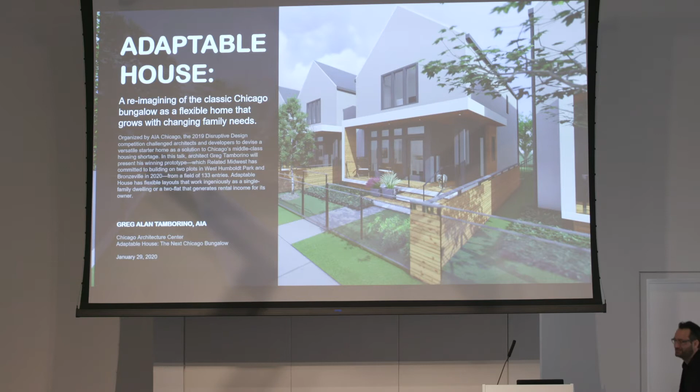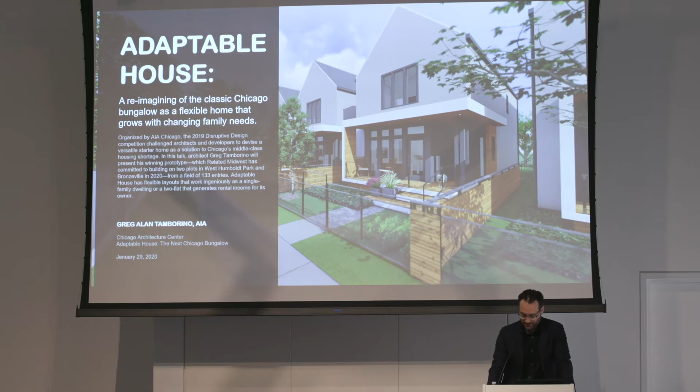All right. Thank you, Ian, for inviting me here to speak about the Disruptive Design Competition. Very pleased to have this opportunity to share with all of you the story about the competition and how we are trying to help sort out the problem of attainable housing in our city. I'll begin with a little background about myself. My name is Greg Tamborino, and although I've traveled many places, I'm a product of the Midwest. Growing up in Wisconsin, and after having bounced around to a few different cities, I've had the pleasure of calling Chicago my home for the past 17 years. And for the past 14 years, I've been with the Chicago office of Perkins & Will.

We are a global architecture and design firm specializing in architecture and interior design. We are celebrating our 85th year, having been founded in 1935 right here in Chicago. And having since grown to 2,700 employees and 26 offices around the world, we have 14 areas of practice, and I have had the opportunity to work in several of them. But for most of my career, my focus has been on urban high-rise, residential, and mixed-use commercial buildings.

I developed an interest in architecture and in general the craft of building things when I was a teenager working for my dad's construction company. Here I learned everything from keeping a job site clean to swinging a hammer in 10-degree below zero weather, which after a few years I very much determined I wasn't cut out for, swinging a hammer, doing anything in 10 degrees below zero weather. And eventually I decided I would go away to architecture school.

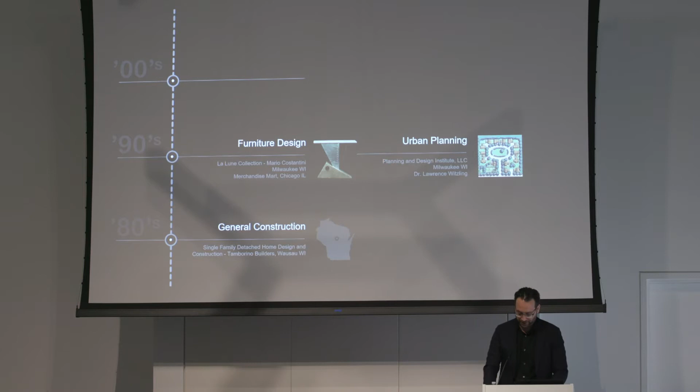And I feel genuinely lucky to have bounced around to a wide variety of work experiences because I feel like there's some component of each that trains you to be ready for whatever comes next. Everything from the intricacies of how a piece of furniture goes together at one scale, working for a furniture designer, to working on master plans for whole cities with an urban planning firm on the other scale.

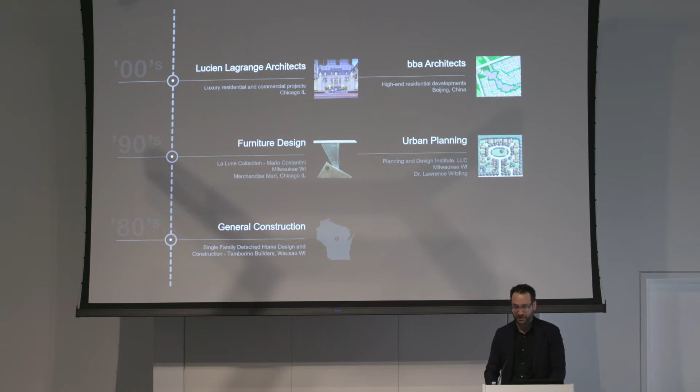In my career, I've had the chance to work on very high-end luxury residential and hospitality projects with astounding high budgets, to traveling to other countries and learning and adapting to different cultures. And there are many more jobs I've had over the years, but the point is there is some piece of each of these experiences that I can point to when I think about how I work and how I think about design.

And I'm here today to talk with you about the disruptive design competition. Because to be honest, the issues that the competition is dealing with are things that I have been contemplating my entire career and involve experiences that I can relate to for much of my life. But it was the combination of those interests and experiences along with the timing of the competition that really pushed me to finally explore the design for an affordable home.

To transition the conversation to the design of the house, I would like to make some conceptual connections to projects I've worked on that directly affect the way I think about design, and then I will show my design and how it addresses each of the goals of the competition. I'll talk a little bit about what the disruptive design competition is, including who envisioned it, the problems they are trying to address, the multi-phased process, and how it unfolds. And after that, we'll have time for a few questions.

So whose idea was this? I can tell you it was not mine. It was a group called the Chicago Housing Policy Task Force, and is composed of a group of organizations with a common goal of investing in the creation of affordable housing in Chicago. So the group includes Neighborhood Housing Services, the Chicago Neighborhood Initiatives, AIA Chicago, LISC Chicago, and Northern Trust.

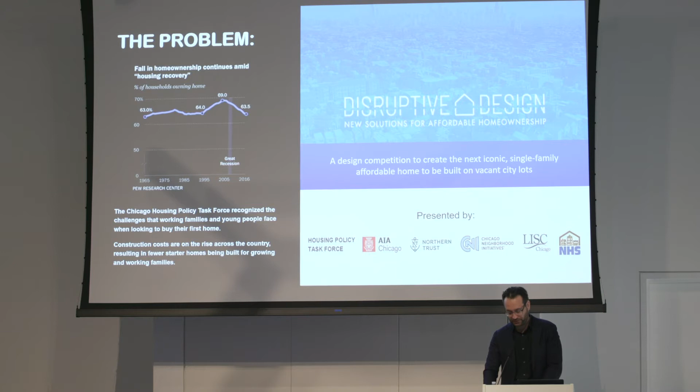Low and moderate income Americans are without savings, living paycheck to paycheck, and cannot afford what generations have taken for granted before them, affordable housing. So, as this whole affordability crisis is unraveling, and not just in Chicago, but in cities all over the U.S., our south and west sides have thousands of vacant, abandoned, or empty lots, along with an aging housing stock.

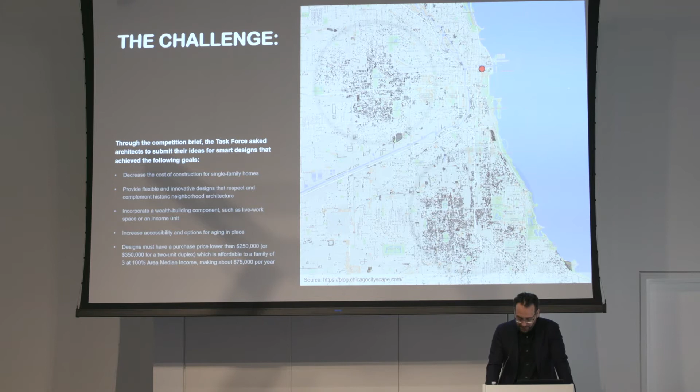And you can see here on the map from the Chicago Cityscape blog the dense concentration of dark gray dots representing the thousands of vacant lots in the city. And you can see how they are quite literally concentrated in the south and west sides. The red dot, by the way, is where we are right now. So the red outlines are the two neighborhoods specifically chosen by the task force for the competition. The red box at the top represents West Humboldt Park, and the irregular shaped boundary to the south near the lake is Bronzeville.

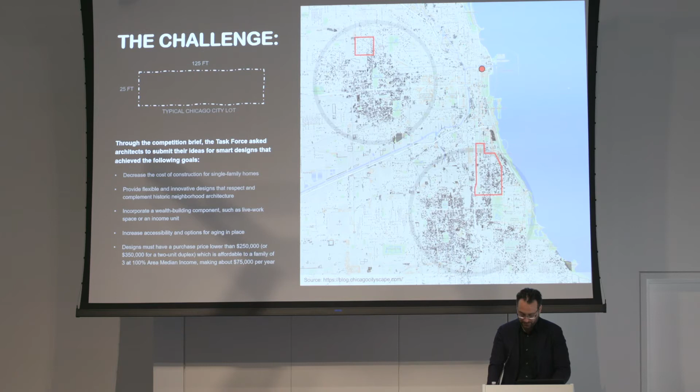So we did not have exact vacant lots to work with in phase one of the competition. It was sort of ambiguous, but we were instructed to design for the typical 25-foot wide by 125-foot deep standard size Chicago City lot. We were also to assume utilities were provided to the property, and we were to assume that it could be either a corner lot with the long side exposed to a street as well as the short side, or an infill lot. In fact, we were to design for both.

So there were several other technical requirements, but what is important are the project goals listed here. Decrease the cost of construction for single-family homes, provide flexible and innovative designs that respect and complement historic neighborhood architecture, incorporate a wealth building component, such as a live workspace or income unit, increase accessibility and options for aging in place, and maybe the most difficult of all, designs must have a purchase price lower than $250,000, or $350,000 if we chose to design for a 2-unit duplex.

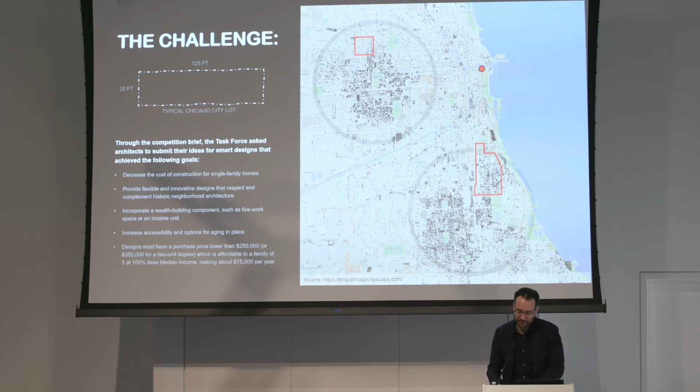And in phase one of the project, I chose to design the duplex because I felt it was easier to hit that price point. So this equates to being affordable to a family of 3 at 100% area median income, making about $75,000 per year. As I mentioned, there are 3 phases to this competition, and technically we are now in phase 3, being sort of make it happen, build it.

Phase 1 began in fall of 2018 when, as Ian mentioned, the AIA posted on their website a call for designers and architects to submit their entries to the competition, and the requirements were pretty straightforward. It was one single 11 by 17 image, and you can see my submission here, along with a 250-word written design narrative, and then written responses to 5 specific questions detailing how we intend our design to address sustainability, zoning and code requirements, a wealth building component, and again, the most difficult one, cost.

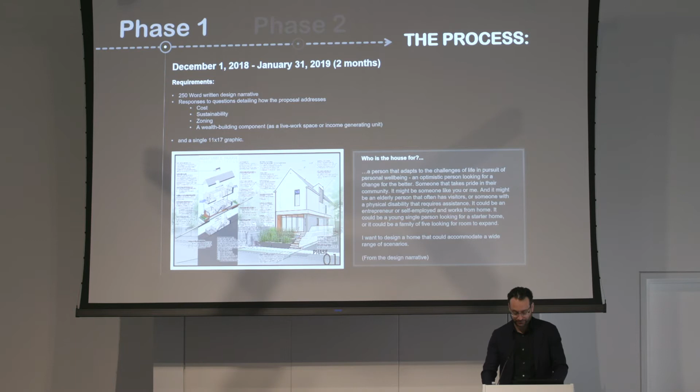The 3 finalists were chosen by a jury that included architects, local developers, and academics studying housing and community development. 3 finalists from phase 1 would later present our drawings to the same jury at the end of phase 2, as well as receive their feedback about our designs after each phase. So they selected the 3 finalists. We hadn't met them in person or presented to them, but we did at the end of phase 2 when we had developed our boards.

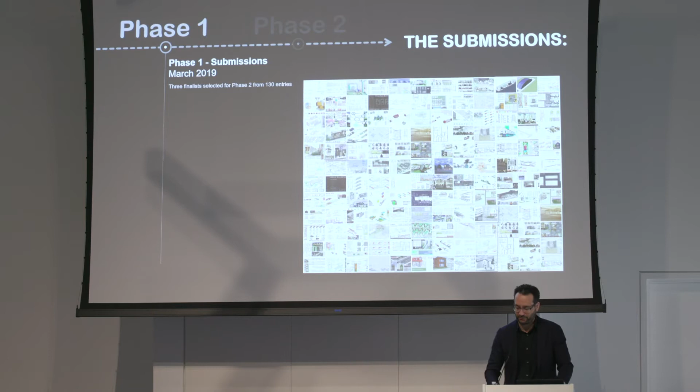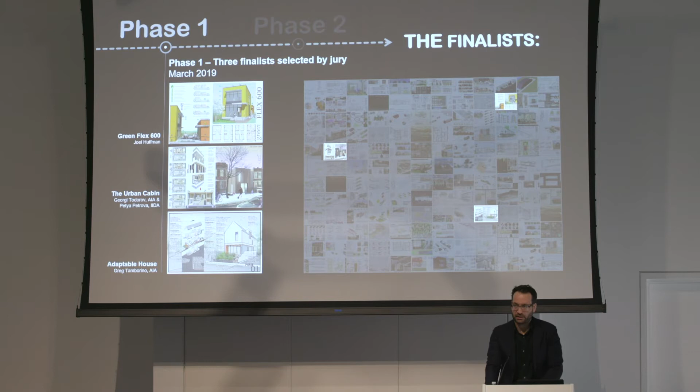So this phase 1 received over 130 entries, some from foreign countries, and it was a blind jury. No personal information could be on the boards. And if you go to the Disruptive Design website, you can download a high-resolution version of all of these boards, and I suggest you check some of them out because there's really a wide variety of interesting and amazing submissions. So from there, 3 finalists, as I'm showing here, were selected to move on to phase 2. Oddly enough, all 3 were from Chicago.

Phase 2 was a bit more rigorous and fast-moving. Everyone kind of upped their game and took things a little more seriously. And it entailed a series of community meetings in each of the 2 neighborhoods, West Humboldt Park and Bronzeville. The first set of community meetings was to gather feedback on the designs from our phase 1 entry, and we were invited to present again several weeks later when we had 3 fully rendered large-scale presentation boards with detailed plans of our phase 2 proposals.

And at this stage, specific lots were provided by the committee, 1 lot in each neighborhood. So at this point in the process, along with meeting people in the community and the aldermen at the community meetings, we had a better sense of the neighborhoods and a realistic site and context to design to.

This is one of the three finalists in no particular order. This is by Joel Huffman, another Chicago-based architect. So I'm speaking on his behalf now. His project is titled Green Flex 600. And the 600 refers to the 600 square foot module that he stacks in various ways on the lot to accommodate a variety of homeowner lifestyles or needs.

The concept anticipates the benefits of ADUs, accessory dwelling units, like a coach house, to create more density in neighborhoods zoned for single-family detached. His proposal has a very low cost of entry because of the idea that you could build and live in a single 600 square foot tiny home, as shown on the right, and later, when you have the resources, build any configuration of unit to live in while renting out the ADU. And he's showing an example here of that with the 1,800 square foot two-story unit plus basement on the left, and the other single 600 square foot sort of tiny home on the same lot, just to the right of the primary structure.

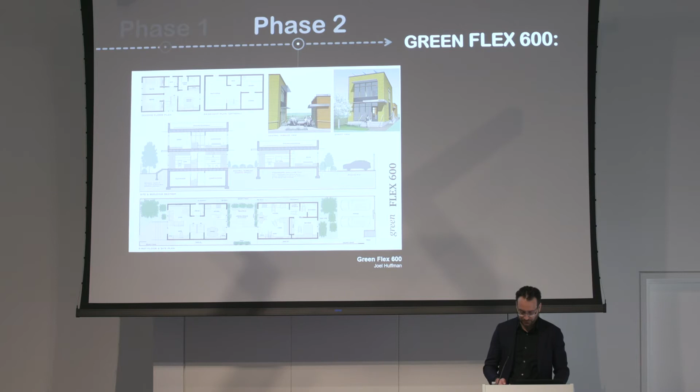This is the second of the third entries. This is, again, from a Chicago team by architect Georgi Todorov and designer Petya Petrova. And theirs is titled Urban Cabin.

It's focused on keeping costs down by designing a simple shaped building that is slab on grade, has durable and low maintenance materials, and takes advantage of an innovative and environmentally friendly system called cross-laminated timber construction, where large slabs of lumber are adhered together under factory conditions and when delivered to the site can quickly be erected to reduce

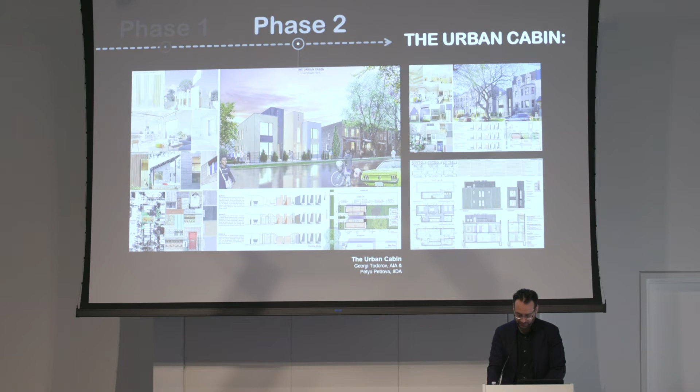the construction schedule. And I really particularly like their design and their renderings, and especially their use of materials, and I just like the simplicity of form.

Here's my entry from phase 2, and although the floor plan has changed considerably, I'll show you that. It's now much smaller and more compact. It still maintains all the initial goals of having a flexible layout, a connection with nature and wellness, accessible features, an income-generating option for the homeowner, and I'll show you those in detail.

I titled it Adaptable House because I really envisioned for this to be successful at any level, it needs to adapt to a wide variety of living conditions. It should be able to adapt as your life changes, whether that is a financial change, a change in the size of the family, you might have to live with a handicap that you didn't anticipate, or even just growing old but wanting to live at home or live with an extended family.

That, to me, is what makes a community stronger. It's designed for those type of people that want to plant their roots and invest in a neighborhood and not just live there temporarily. I also designed the house adaptable in a way that it can be constructed either as a single-family home or as a rental. I'll show details of that later as well.

The competition brief required entries to pick one or the other, but I felt that it was far more functional in the long term for the home to be able to be adapted from a two-flat to a single family, or the other way around, so that as the family grows, either by having children or joined by aging relatives, or you simply just need more room, they could adapt the house to their needs.

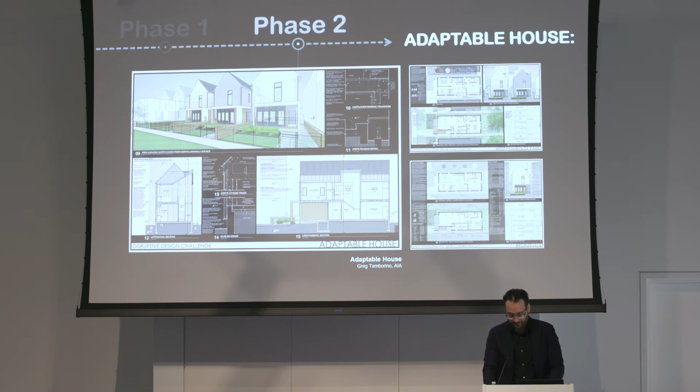So that concludes phase 2 of the competition. I was and still very much am overwhelmingly proud to be selected as the winner to move on to phase 3 and work with Related, NHS and CNI and the rest of the task force to further develop the details, work on cost, select final lots, and work along with the city of Chicago to build 2 prototypes of the

design. Phase 3 is a sort of proof of concept phase and hopefully inspire a whole lot more investment like this in these communities that not only need it more, but have not had investment like this for a long, long time.

I very briefly want to take a step back and zoom out and make a connection to 2 or 3 projects that in some ways are very different from the competition starter homes we are designing. I would just say that, while working nights and weekends on the competition because I was doing it outside my 9-to-5 job, I kept thinking about how many significant parallels there are between the design of a large, high-rise, multifamily building that I know so well and work on every day

that have very different budgets and targets and goals, and how that compares to something as small as a single-family detached home. And I started sort of realizing that there are very many parallels. There are constraints and demands on large, big-budget buildings that, to me, directly translate to the other projects, regardless of scale.

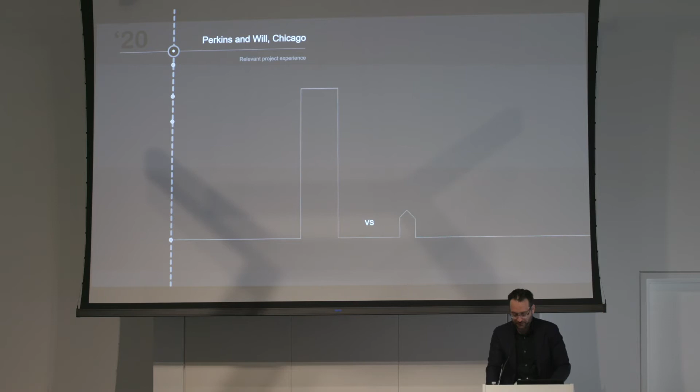For example, designing spaces to be as spatially and materially efficient as possible, and orienting windows to take advantage of views or to bring light deep into a space. This is a project that I worked on my first day at Perkins & Will in 2005. I probably have 100 versions of a typical floor that we used to find the right balance of unit size

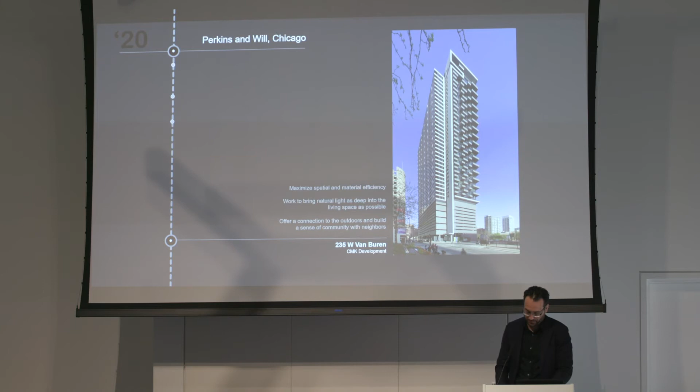and function. This was a very wide lot and has a very wide floor plate, and like the homes on the deep, narrow Chicago lot, we wanted to get as much natural light as deep into the space as possible. So we have very open and bright 10-foot ceilings with floor-to-ceiling glass on the exterior.

This is actually a pair of projects also in Chicago and also located along the Chicago River, which directly influenced how I thought about my design for Adaptable House. For one, the day one directive from the owner and the developer, Lendlease, was that we both integrate the building with nature and we integrate the park with the neighboring community. So they approached the project with a strong sense of social responsibility from the very beginning.

The image on the lower right is actually stacked townhome residential units at the podium that wraps the tower. So that tower behind is connected to that. The units overlook the park, but they also hide a 6-story parking garage from sight. The whole facade is activated, and the ground floor units have open patios facing the green space and are separated from the park by a wetland feature that is irrigated by rainwater collected on the roofs.

The roof has a vegetable garden and beehives pictured on the upper left. The 2-acre park is full of native species of plants and becomes an amenity for the neighboring community, as well as the people that live in the building. And these parallels will make more sense when I get to my current design.

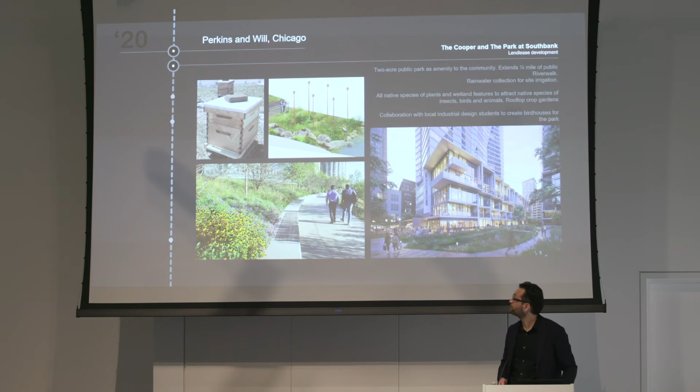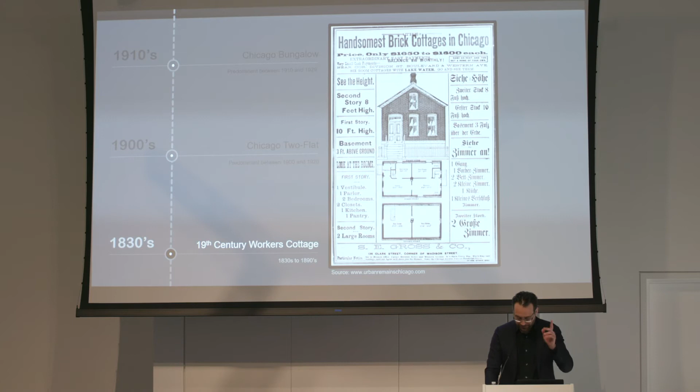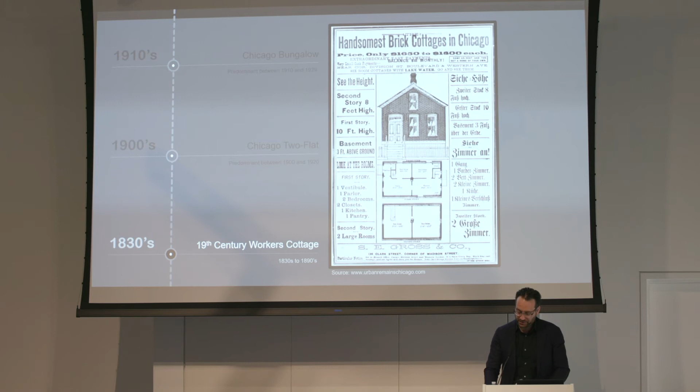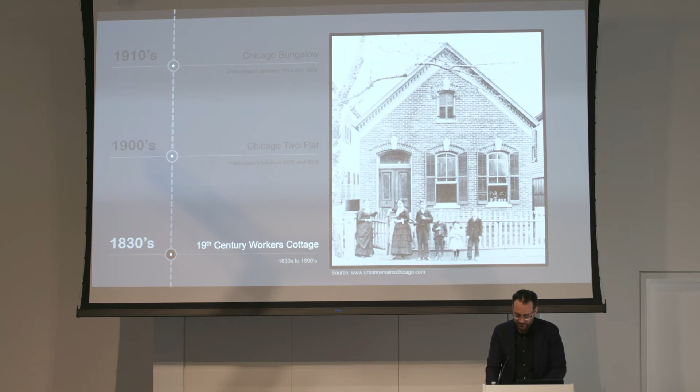Now, a quick reference to 3 relevant housing types that are part of the Chicago vernacular and heritage of the city. And quite unlike the glassy high-rise buildings, these modest historical examples of Chicago living also directly influence how we think about contemporary design. The first being the 19th century workers' cottage with its simple, standardized plan and understated design. These were often mass-produced and very much intended to be affordable. They are long and narrow, usually 1 or 1.5 stories, and almost always a classic box shape with a pitched gable roof facing the street.

Next is the Chicago 2-flat, a 2-story building with an apartment unit on each floor, stacked one above the other. These are characterized by a front porch, bay window facing the street, modest architectural expression, so not much ornamentation, and strong, durable exterior materials such as brick or stone. Chicago was growing, and it made sense to build denser housing. And this was often a starter home for immigrants or first-generation Americans looking to invest in the communities in which they live. They, again, are simple, understated designs.

It's a combination single-family house with a live-in landlord coupled with an affordable apartment for added income to the property owner. Sounds very familiar, doesn't it? They are abundant in Chicago, about 1/4 of our housing stock, but unfortunately these are aging and deteriorating and expensive to maintain, making affordable housing options even harder to find.

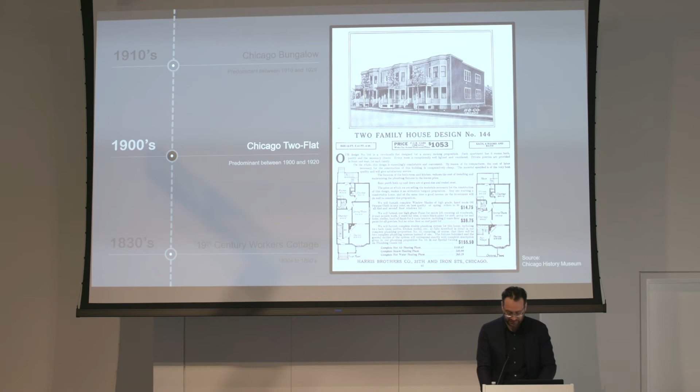Finally, there's the distinctly Chicagoan bungalow that makes up a bulk of our housing with about 80,000 units around the city. These are early 1900s, 1910 to 1929 or 30, usually solid brick construction, fire resistant, and really built to last. They are characterized by having an offset front entrance or side entrance and plenty of windows to bring in natural light and fresh air. So like the 2-flat and the workers' cottage before, we have a focus on functional use of space and simplicity of form. And like the two flat, these were starter homes for a generation of immigrants looking for a place of their own in the city.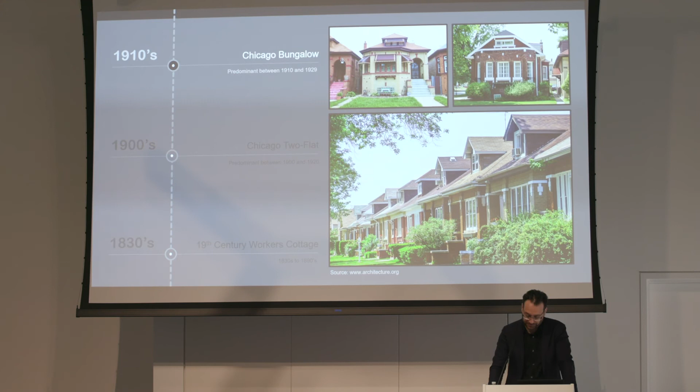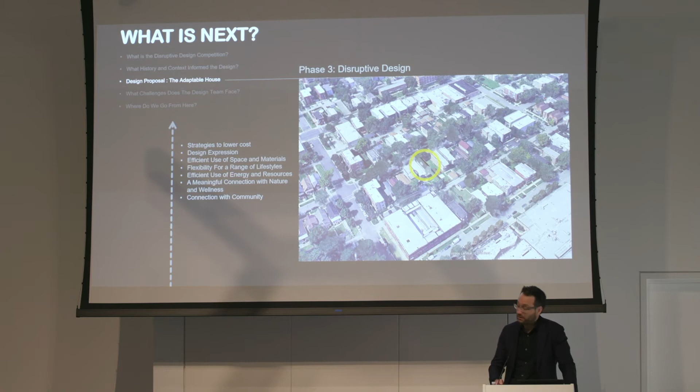So what is next? That brings us to the competition. What will be our next interpretation of the affordable Chicago house for the missing middle? I am pleased to announce we have a site in West Humboldt Park, and it's mid-block. The street facade faces west, and it's adjacent to what appears to be another vacant lot. I'm showing here the adaptable in the yellow circle. The adaptable house is rendered in the empty lot. It's actually two vacant lots next to each other.

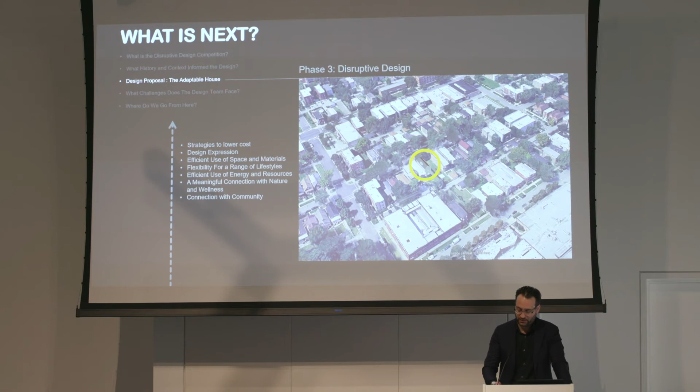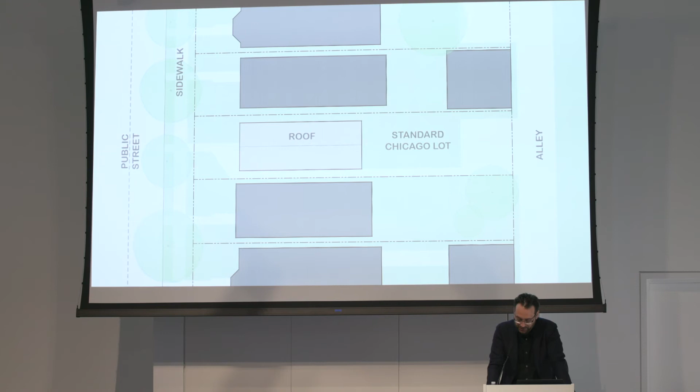So we are currently working with the City of Chicago on acquiring a vacant lot in West Humboldt Park, and as soon as that happens, we want to move forward as fast as possible and get these built. So before I go into the house, I'll just start with this basic diagram representing what is a typical condition in most Chicago neighborhoods, for those of you that might not be from the city or familiar. Here, the light gray roof in the center represents my design for the house, not on the current site that I just showed you, but in relation to neighboring buildings on another site we had been looking to acquire. But the argument for it is the same.

On the left, you have the public realm, which is often a tree-lined street, followed by a strip of grass and a pedestrian sidewalk. So in Chicago, it is uncommon to have vehicular driveways off the primary street. Instead, we have a network of narrow alleyways where cars barely fit past each other, where the garbage and services are picked up. Kids often play.

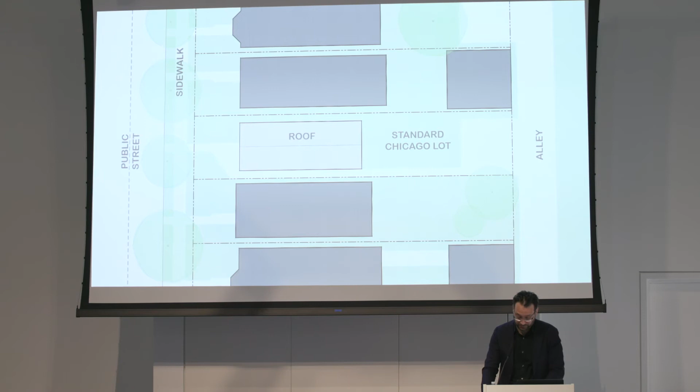Like I mentioned, the lots are very narrow and very deep, and usually oriented with the long dimension facing south, like shown here, which is actually ideal in this climate for taking advantage of solar paths. Immediately off the alley is often a two-car garage, but not always the case. Sometimes it's just a concrete pad.

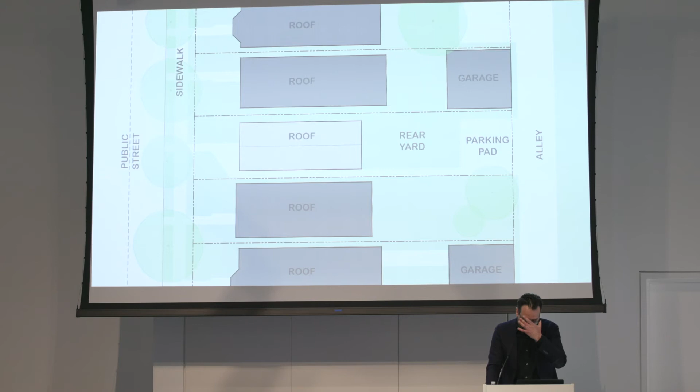The deep lots do come with the benefit of the opportunity for a private backyard, and I want to point out for my design in the middle, the walkway that connects the parking along the alley to the house, as well as the connection from the public sidewalk to the front of the house. Keep this in mind because it'll be discussed when it comes to the interior layout later.

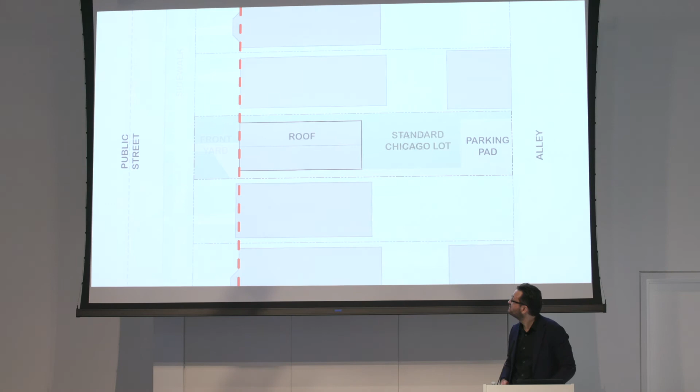Typically, the front yard setback is established by zoning, or on sites like this one, limited by the average setback of the two neighboring buildings on either side. So this line defines the location of the front of the house. Regulated by zoning requirements, side yard setbacks can vary in dimension and are dependent on a few things, including the fire rating of the side load-bearing walls. This is important because it really dictates your room layout when you're starting with 25 feet and you're working down to 19 feet wide for the house.

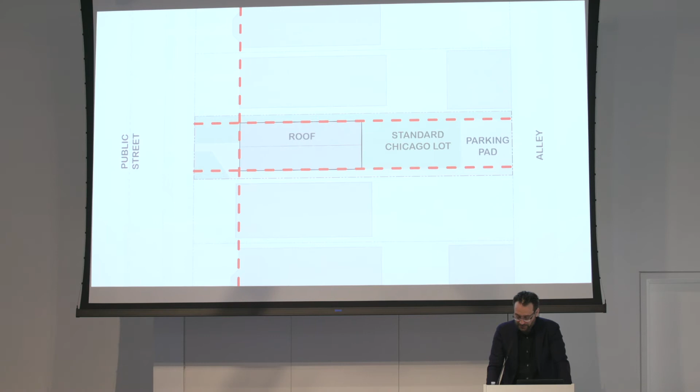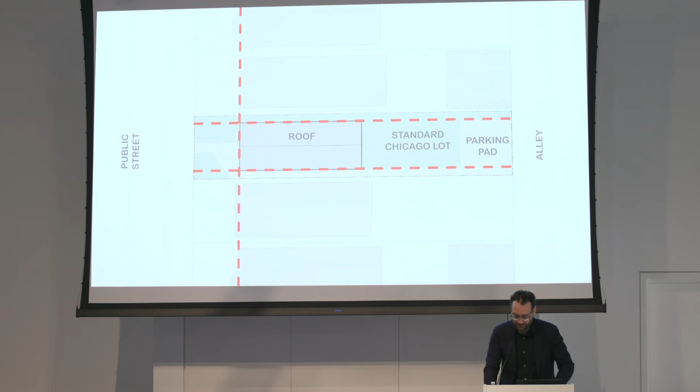We ended up setting our side yards to 3 feet on each side. For one, it allows for a handicap accessible route on one side of the building, like I'm showing on the south, and it reduces the cost overall of the building because you don't have to build a 2-hour firewall on the north side. As you can see then, the overall depth of the house is really the only variable left to control the size.

And that is the first way we focused on controlling cost, by reworking the floor plan through dozens of iterations to make it as compact and efficient as possible. And we really might not be done yet, but we do feel we have a cost-effective and functional plan that occupies as compact a footprint as possible.

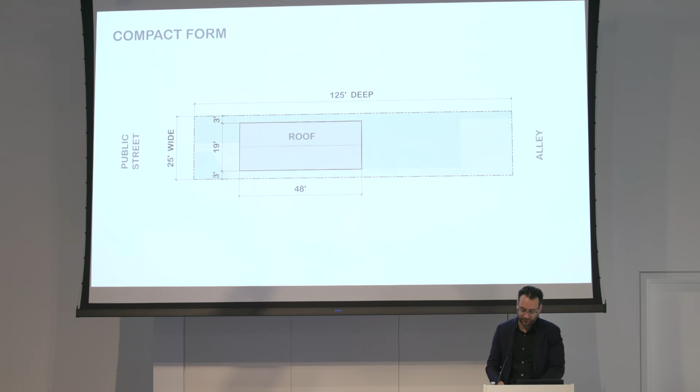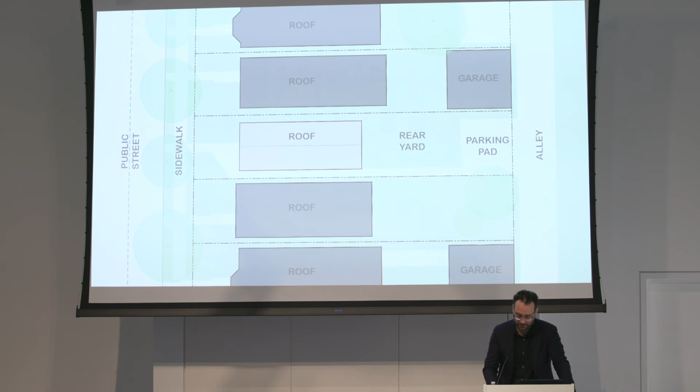I put most of my focus of the exterior design on the front of the house. The remaining 3 sides are pretty basic and unadorned, and I was especially interested in the transition between the public realm of the street and sidewalk and the private realm of the house. You know, the space in between, really the front yard. I felt that was a big opportunity to utilize some design ideas that I had learned in the past.

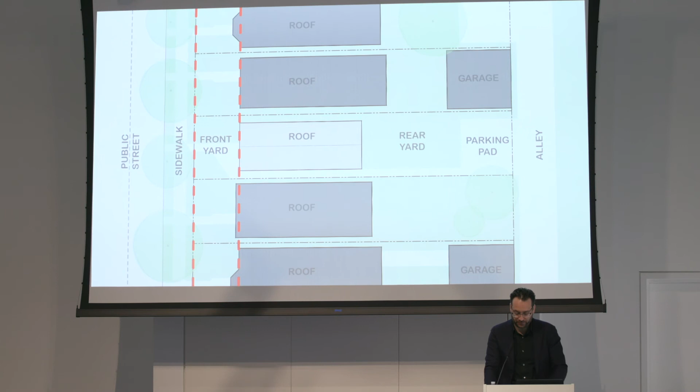And I wanted the home to feel open and connected to the exterior, and at the same time create a living space that can be private and separated from the outdoors if the homeowner chooses. So the whole approach to the front of the house is to make it feel open and connected to the community, while at the same time maintaining a sense of privacy and security. And there are a few ways I went about to achieve this.

One, the ground floor facade is as glassy and open as I could make it, which sort of enhances the feeling of safety from inside and on the street, because windows give you a feel that there are eyes on the street. But the windows are set in behind a deep porch overhang, which shades the living space from the hot west summer sun. The porch was actually kind of large and almost exaggerated. I think it gives the house some personality, and it defines that space that transitions between indoor and outdoors.

Outside that is a raised bed of planters that are native and do not require extensive irrigation or upkeep, along with this low horizontal transparent front fence. The planting also acts as a barrier defining the semi-private zone of the porch, as well as the fence, which is intentionally transparent.

The ground floor is slab-on-grade construction, again to save on cost, but I raised it 2 feet above the surrounding lot to give the house a feeling of presence. And when you're sitting on the porch, it's kind of nice because you're at eye level with the people that are walking by.

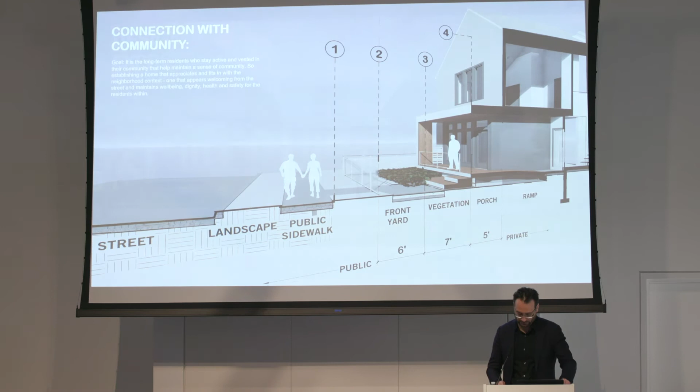The directive from the jury and the community meetings was that the house must have curb appeal. And what does that mean? I don't know. I chose a warm, natural material, possibly cedar, possibly another wood, to wrap the front porch, above, below, and to the sides. The palette of materials on the house are intentionally humble and commonly available. And if we are going to spend a little bit more money, I wanted it to be at the front of the house where you're up close to it and you can see it. I figured the porch is the perfect place for that.

The remainder of the house can be clad in a variety of options, whatever the homeowner really wants, but they need to be chosen for their durability and relative low maintenance. We don't want the homes to look worn out from age. Weathering is fine, but deterioration is not okay.

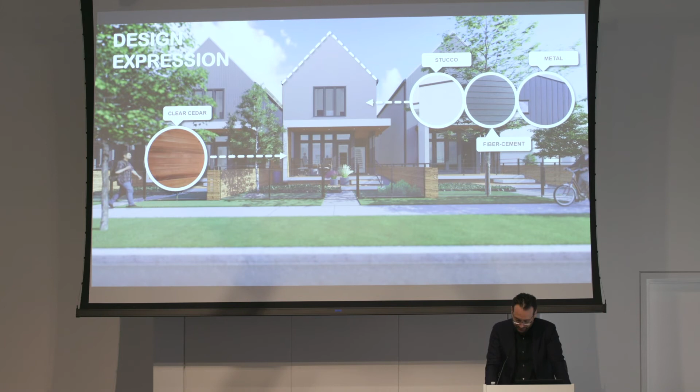From the day I began the project, I decided on the steep pitch gable roof. It reads as sort of this icon of home and has an uplifting presence on the street. It's simple to construct, easy to detail to avoid problems with snow and ice and rain. It just made sense, so I didn't debate that part.

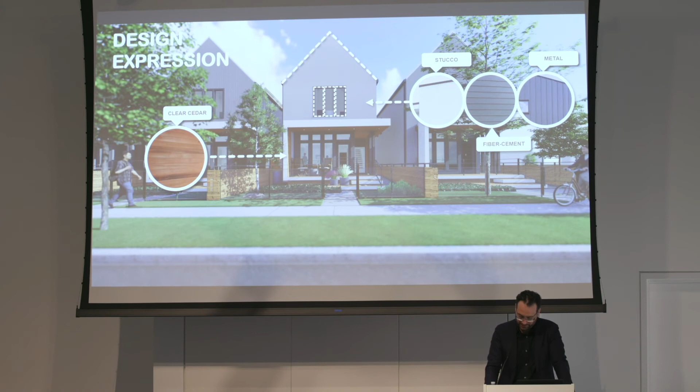However, I must have tried 1,000 variations of the upstairs window. I wanted to bring light deep into the space, and it needed to be a tall window. And in the end, I really like this sort of 3-wide tripart division of a square that in a subtle way references both the bay window of the old Chicago 2-flat and the historic Chicago window that covers the turn-of-century skyscrapers in the Chicago Loop. So I kind of like that reference.

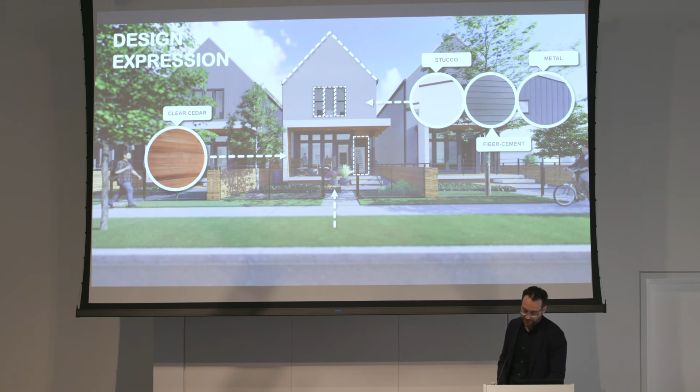The gate brings visitors in on axis with the house. And like the Chicago Bungalow we talked about earlier, the entry is recessed and to the side, and in this case protected by the deep overhangs of the porch. These building sections are simply to help understand the next series of floor plans, so I'll explain that in a moment.

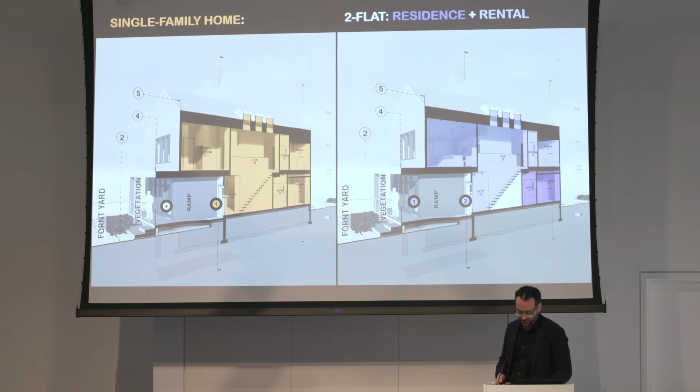These plans show how the shell of the building can be built as either a single-family layout on the left or a 2-flat unit on the right. And in this diagram, note on the left, there's an orange dot in front of the door. That's your main door to the house. It can take you upstairs to the bedrooms, or it can take you directly into the living space down below. And then that white dot, that front door off the porch, is merely a convenience to access the porch easily.

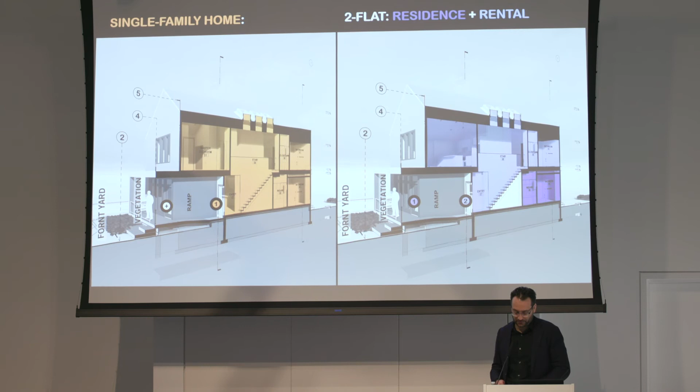And on the right, where you have one unit above the other, the porch door, the dark purple circle on the left, is your main entry point to the lower level. And then, of course, the other door takes you up to the upstairs.

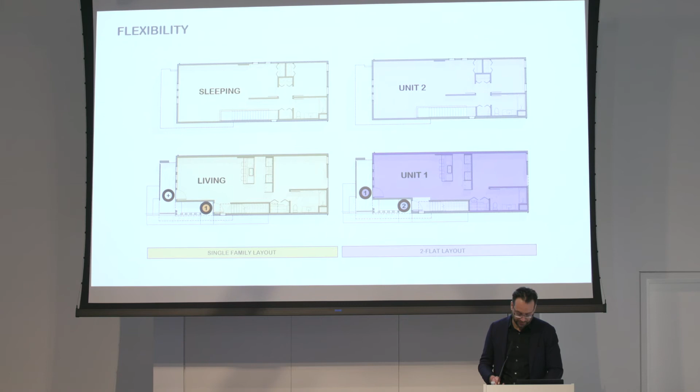So you can see here highlighted in color the minor differences between the two plans. The two-flat on the right is a one-bedroom, one-bath, single-floor unit. It could be the live-in landlord example from before. A fire-rated wall shown in blue separates the upstairs entry from the downstairs living space.

It's right here. The ground floor of the single-family plan on the left has at the back of the house what we're calling a flex space. This could be an extra bedroom, a formal dining room, a media room, a studio space, a work-from-home office. It's really another potential source of income from the home. And this one has a back door to make it easy to access. It's a single-family house, so it has a private backyard. And then on the right, a walk-in closet and door just completes the private bedroom.

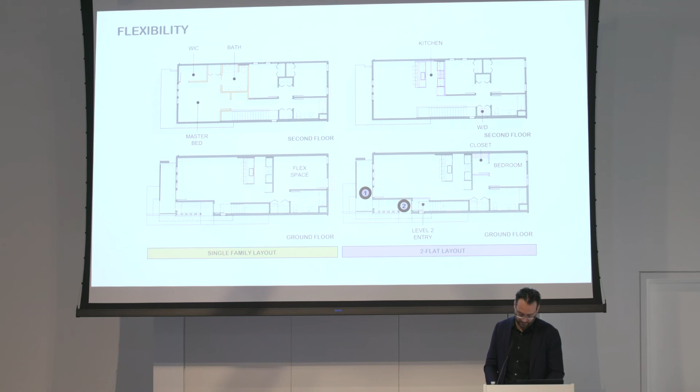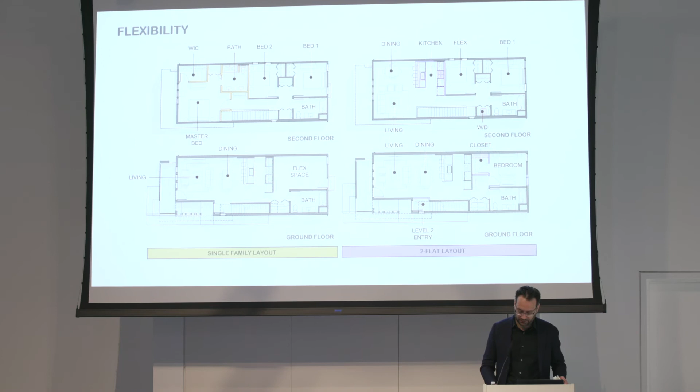It was also a requirement of the competition to design a home that is visitable by someone with a physical disability, as well as accommodating for an elderly person that wishes to age in place. It was important to me, as I pointed out earlier, that the first level floor be raised above the surrounding grade. So I developed a side yard ramp that connects visitors from the front sidewalk to an intermediate landing, and that's where the door happens to go upstairs.

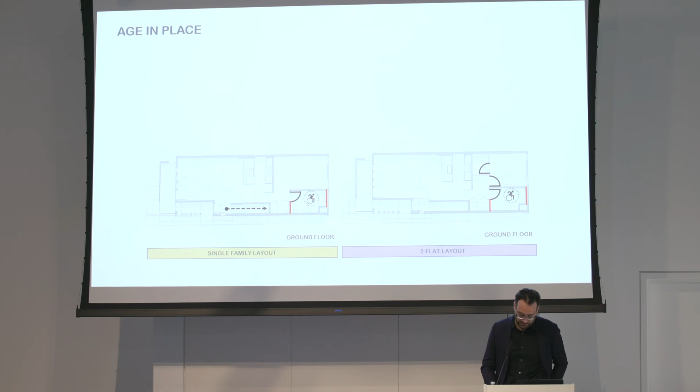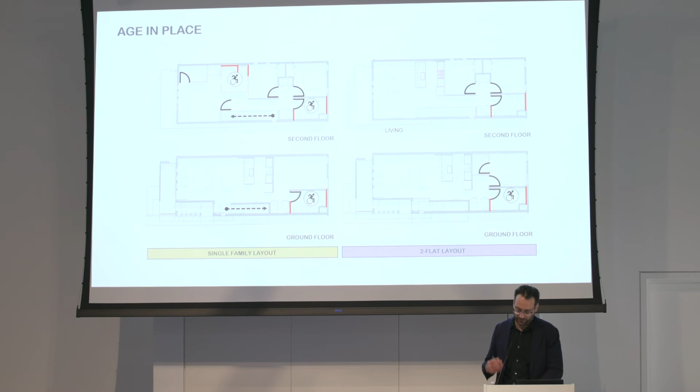The stair is sized and reinforced to accommodate a wheelchair lift in the future, if the homeowner desires. This way, each floor of the single-family house can be fully accessible. Again, all the doors, shown here in black, are designed to accommodate the passage of wheelchairs. The red represents added reinforcement or blocking inside the walls to accommodate future grab bars if they're needed.

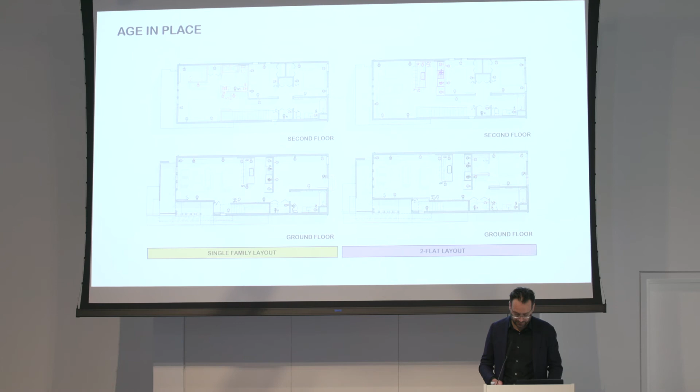And finally, items like door handles and cabinet pulls and light switches and outlets and plumbing fixtures are all designed to be within reach range to be more accommodating to those with a wider range of disabilities. Structural efficiency. I'd like to point out a few ways that I'm looking to make the form and structure of the house as efficient as possible.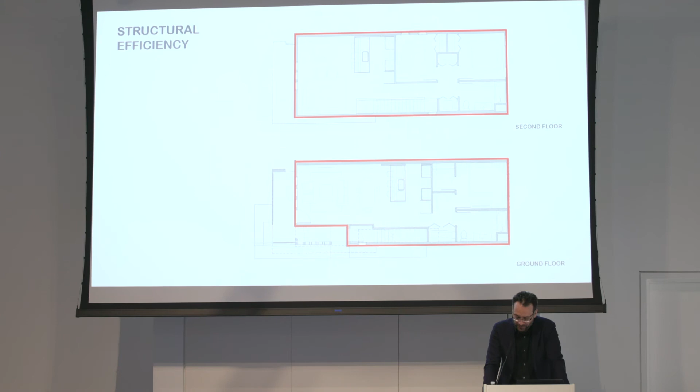The first decision was to focus on making a compact form, because a compact form is most efficient for conserving energy. So the closer to a cube we can make the form, the more cost and energy efficient it will be from the start. Reducing the footprint of the house is one of the most direct ways of controlling the overall building costs as well. A simple rectangle is also the most efficient use of framing materials, as opposed to a shape with several intersections and changes in plane that would require complicated and costly structural framing solutions.

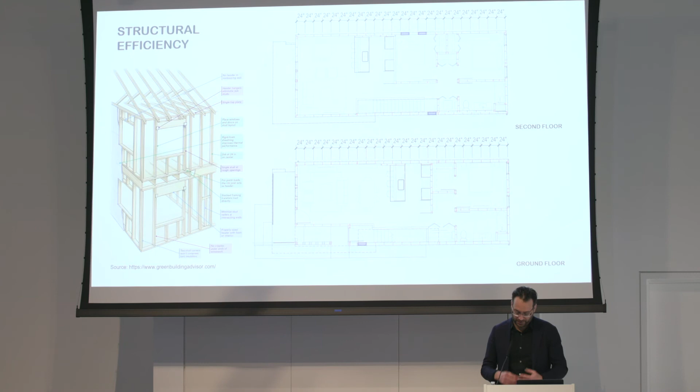To reduce construction waste as much as possible, the entire house is laid out on a 24-inch grid, which is the most common dimension for lumber and sheet goods. Windows, highlighted here in blue, are spaced between studs in the load-bearing walls on module to simplify the framing and again to reduce framing materials.

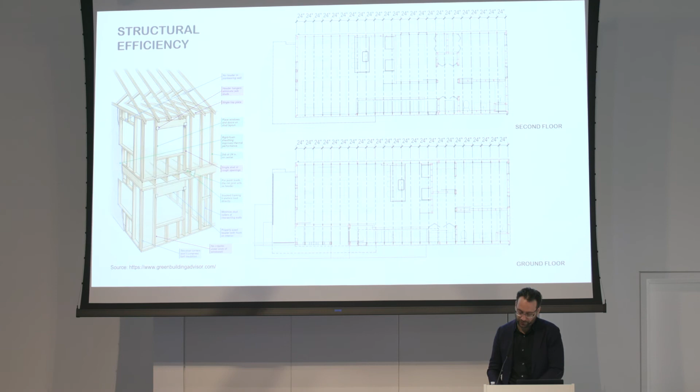And we are studying the value added of advanced framing techniques, which means all the structural members from the roof truss to the load-bearing wall studs and floor joists are aligned directly one over the other to further reduce lumber, and it reduces material cost, reduces labor cost, and measurably improves the thermal performance of the house.

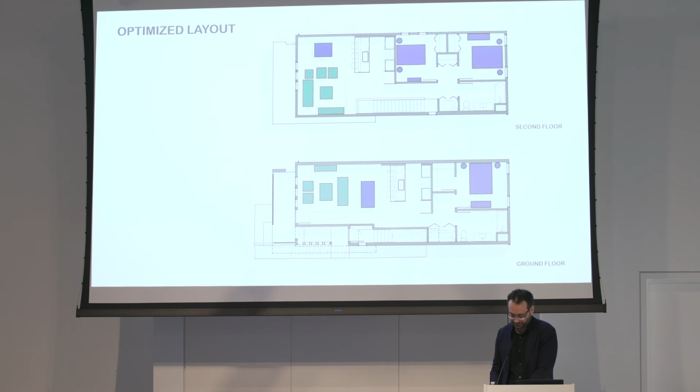Then a quick note on how we optimized the layout to fit a very compact floor plan. The floor plan is designed to be as space efficient as possible by working to eliminate non-functional space. And this is similar to the way we optimize room sizes in the big multifamily high-rise projects. Rooms are sized to accommodate an ideal furniture layout as opposed to trying to fit furniture into an irregularly shaped room. But furniture placement is not strictly controlled, of course. There remains flexibility in the arrangement, but the spaces are well defined and sized to work well.

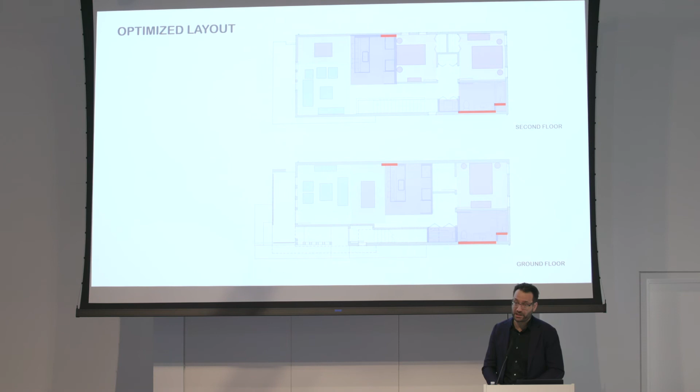Living spaces are located near the exterior walls at the ends, with the kitchen and storage at the center of the building, with fixed plumbing chases, which are shown here in red. And the plumbing chases stack and are planned for as short as possible and efficient plumbing runs. The main gathering area of the house is a flexible open plan that accommodates everyday activities from lounging to dining and has a visual connection between the entry, the primary circulation, and the center of the home, that is the kitchen. And it just results in a very compact and efficient plan, and it may not be over yet. We are continually trying to refine and make it as efficient as possible.

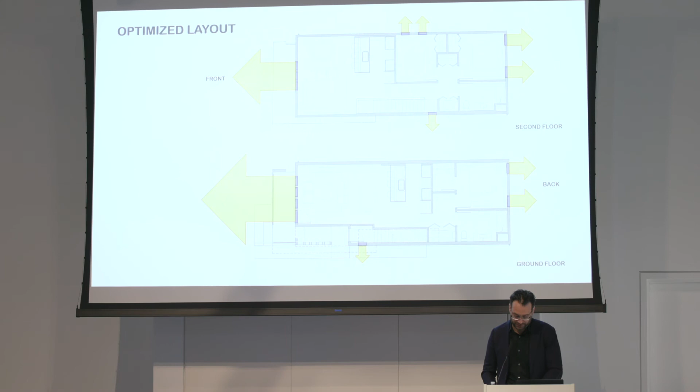By locating the living spaces towards the ends, facing the front and rear yards with tall windows, we are able to maximize daylight to those spaces, offer views to the outdoors, and operable windows allow for fresh air to flow through the house. When built out as a single-family home, private bedrooms are clustered upstairs, away from the more active live-work areas below.

Okay, the efficient use of energy and resources. The development team, the competition organizers, and we all agree that the home not only needs to be affordable, but it needs to be affordable to maintain and affordable to operate. We also have very ambitious goals and are in the early stages of exploring some of them to see if we can make the home net zero ready.

In other words, by adding solar panels to the roof, constructing a home that, when averaged over the course of a year, generates at least as much on-site renewable energy as it consumes. The first way to go about doing that is reduce the amount of energy consumption to the point that a PV solar array makes sense.

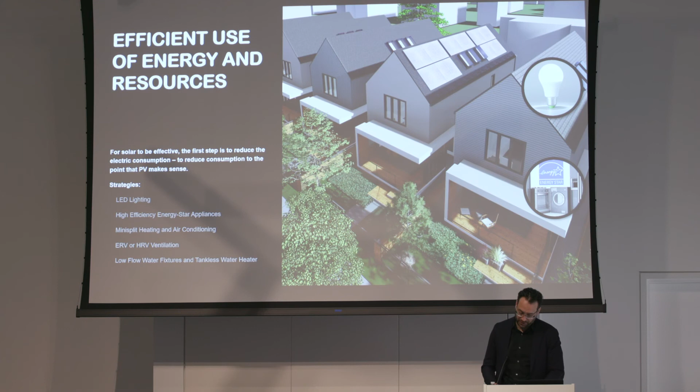So in an effort to reduce energy consumption, some steps in that direction that we are exploring include all LED lighting throughout the house, high efficiency Energy Star appliances and water heaters, mini split heating and air conditioning, energy recovery or heat recovery ventilation, low flow water fixtures that consume less hot water, thus consuming less energy.

We're also looking into all electric appliances, that means no gas range, and plan to have the roof truss engineered to handle the added weight of future solar panels. We even plan to bring conduit to the roof so that the house is truly solar power ready.

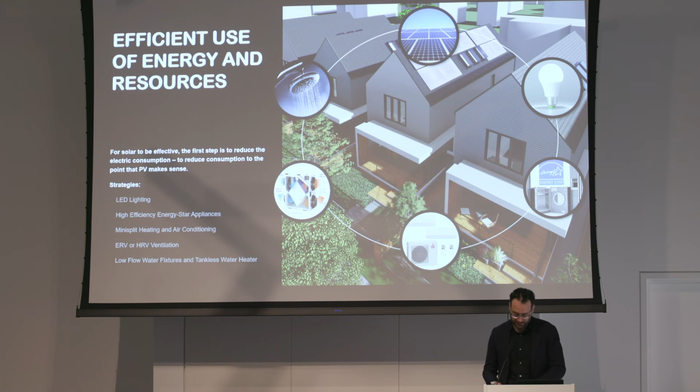We are also looking to increase the level of insulation as much as possible. So after figuring out how you conserve all the energy with the previous slide, we need to look at how to retain it. So some systems and technologies that we're either already employing or considering to include on the house is an exterior layer of continuous insulation to greatly reduce the thermal bridging.

The advanced framing techniques, so spacing the studs farther apart and aligning the structure, as I mentioned, from the roof to the foundation to save on material and money, but actually make the job easier and faster for the trades running conduit, pipe, and mechanical systems because stud and joist bays have more room.

Air sealing is the most basic and cost-effective effort you can make to increase the energy efficiency in new construction. So accompanied by proper ventilation with energy and heat recovery, right-sized mechanical systems, and optimized wall insulation, it's really not that complicated to have a high-performing, energy-efficient, and comfortable home.

We are looking at unvented roof assemblies to simplify the detailing, and similar to our wall construction with the continuous insulation at the exterior, if you locate a portion of the insulation above the roof sheathing and below the shingles, you greatly reduce the thermal bridging and increase your efficiency.

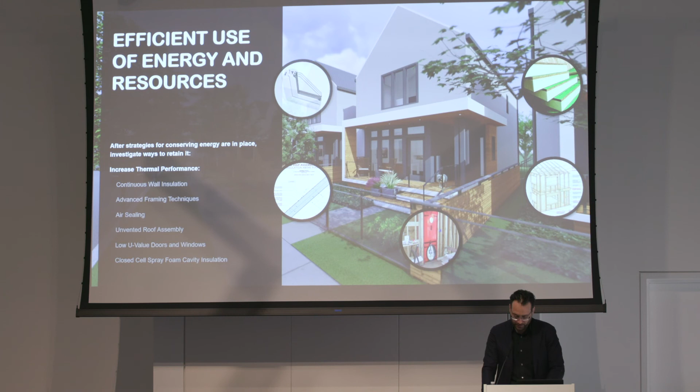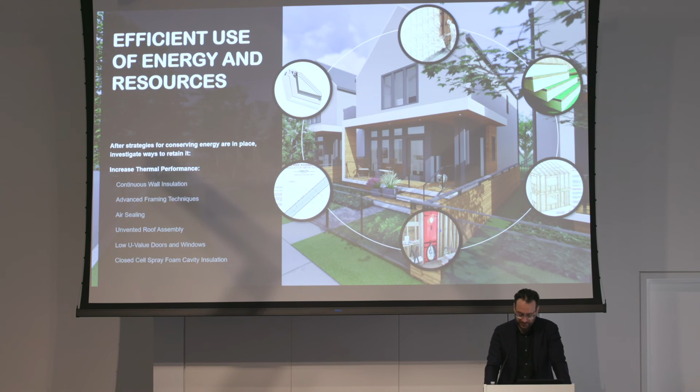We are talking to manufacturers for low U-value doors and windows, so we're in contact with people that can offer triple pane glazing at a fairly affordable rate. And finally, closed cell spray foam insulation as a way to fill all the gaps and make the building as airtight as possible. So that basically concludes my presentation. Thank you again.

I will open it up for questions, but a few pointers of what challenges the design team faces. That one's easy. It's primarily cost. We continue to refine the design, and what I'm showing you here is what we hope it to look like. It'll function in the same way that I described, but there might be a VE exercise in terms of materials and some of the options.

And then where do we go from here? We're tackling some bigger ideas, like I mentioned the solar arrays. We're thinking about things like geothermal as an option, or offering the customer sort of a good, better, and best option, where good gets you a high-performing, comfortable house with the features that I mentioned, but you can add on to any level that you want. Maybe it's super insulated, or sky's the limit, really. So thank you.

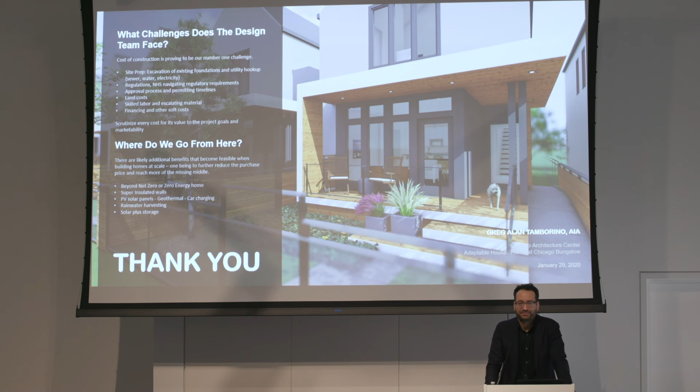That's wonderful. So you're going to build about 100,000 of these? I had two quick questions. One was, I noticed one of the finalists had 2 units on a lot, which, my understanding, currently is not allowed in the city. Do you have any insight if the city is going towards allowing that? And number 2, I'm just wondering how someone in the single-family home gets to the 2nd floor in a wheelchair.

Good. Excellent questions. The first one, your observation is correct. The city doesn't recognize ADUs currently. I don't know where that stands, but I know there's a big effort to change that. And that was kind of a problem with those competition entries that showed it that way. My unit I deliberately left as just a parking pad in the back. No garage was designed. A, it keeps costs down, but B, maybe when that rule changes, someone could build a garage with a coach house, or increase the density even more.

And then your question about the single-family house, that's a tough one, because the ground floor could be made into a bedroom suite next to the bathroom, and then the entire ground floor is fully accessible without a problem. It has the kitchen, the bathroom, the bedroom, the living space. My solution, and I wish there was a better one, was I showed on that slide some reinforcing at the stair, and the stair is wide to accommodate a wheelchair lift to get up to the 2nd floor.